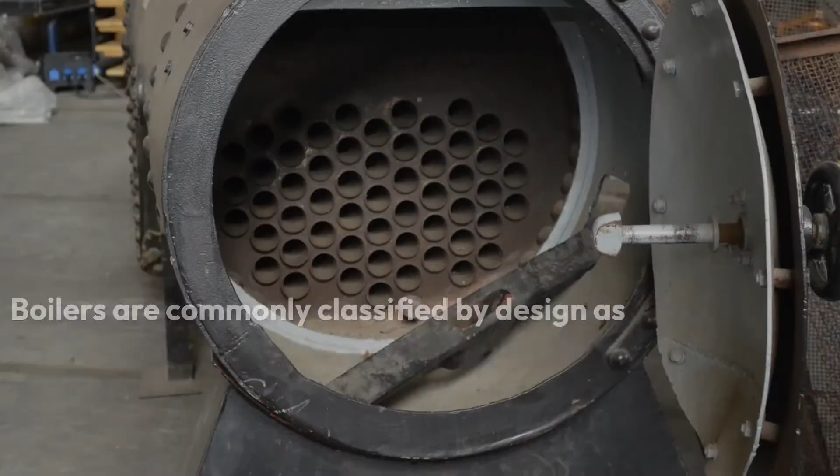Boilers and their related equipment provide steam and hot water for heat and industrial processes. Boilers are commonly classified by design as steam and hot water boilers, fire tube and water tube boilers. They are also commonly classified by their maximum allowable working pressure.

A boiler is a pressure vessel in which water is heated to produce steam or heated water. Steam is the vapor that forms when water is heated to its boiling point. Steam is commonly used for heating or process applications.

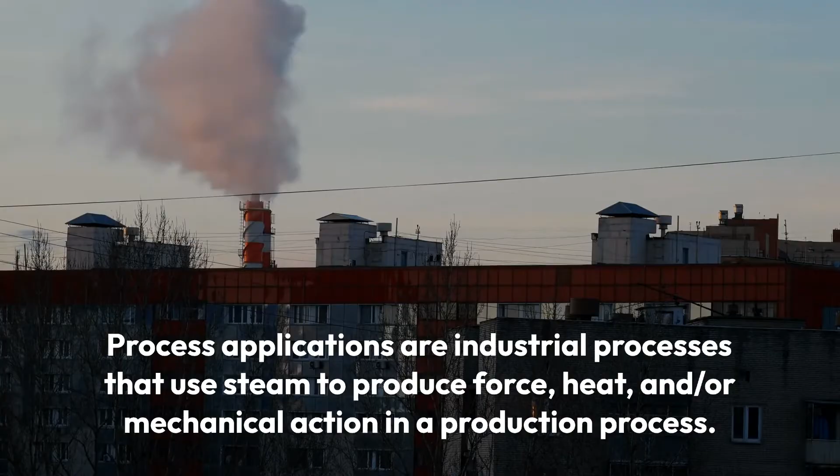Process applications are industrial processes that use steam to produce force, heat, or mechanical action in a production process. Paper mills use steam extensively in pulp processing and drying operations.

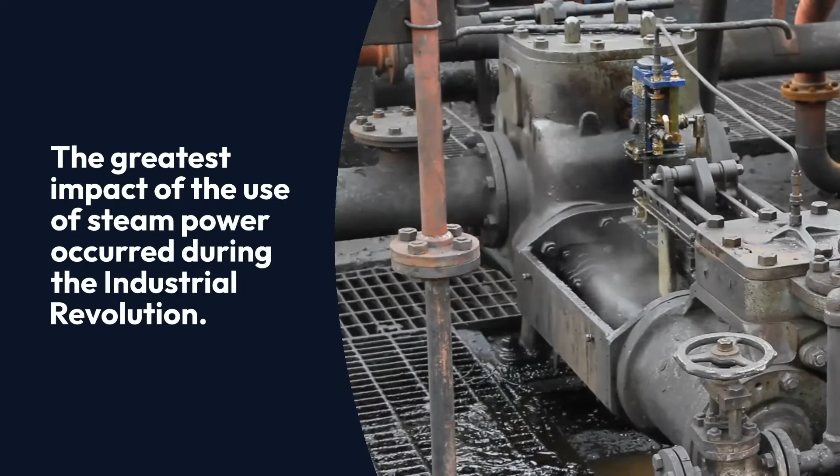The greatest impact of the use of steam power occurred during the Industrial Revolution. During this time, James Watt of Scotland is credited with the development of the reciprocating steam engine. Steam is produced as water is heated at its boiling point, 212 degrees at atmospheric pressure.

The heating surface is the part of the boiler where water is on one side and heat from the gases of combustion on the other. The actual heating surface of a boiler are the boiler tubes. Increasing the size of the combustion chamber will also increase the heating surface.

In a steam heating system, steam produced in the boiler is used throughout the system. When steam cools, it turns back to water. Condensate is steam that has lost its heat and has turned back to water. In a hot water heating system, hot water produced is pumped throughout the system.

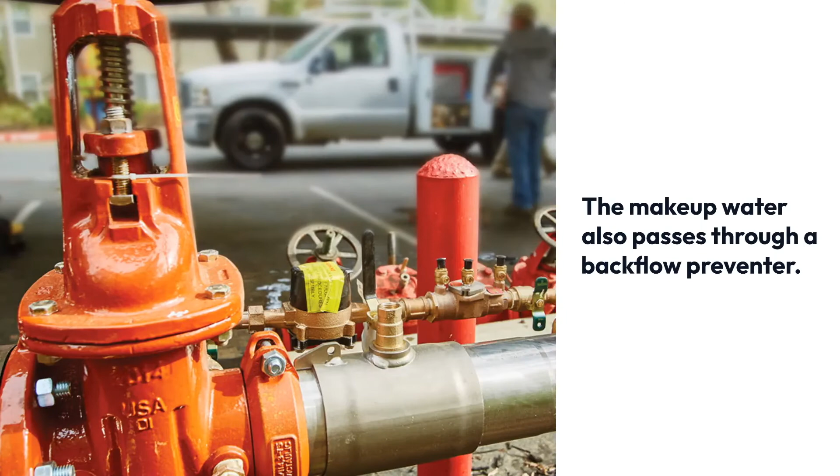Makeup water is added to a boiler to make up for the water loss due to leaks or lost condensate. Makeup water passes through a backflow preventer. This prevents the flow of water back to the potable water supply. A pressure regulator is also used to reduce the utility water pressure to prevent overpressure in the system.

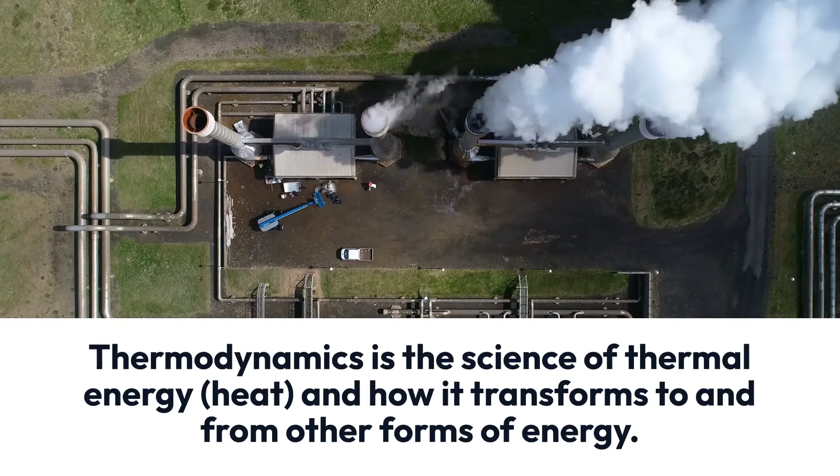Thermodynamics is the science of thermal energy and how it transforms to and from other forms of energy. The two laws of thermodynamics that help explain how a boiler operates are the first and second law of thermodynamics. The first law states that energy cannot be created or destroyed, but can be changed from one form to another. The second law states that heat always flows from a higher temperature to a lower temperature.

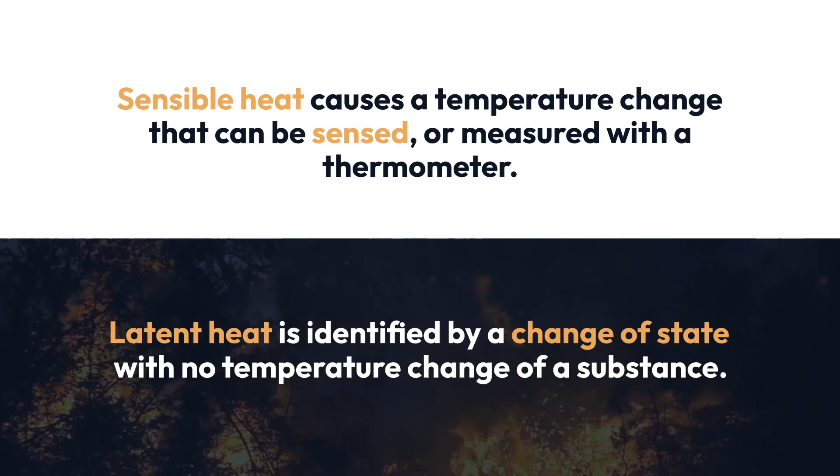Heat is the form of energy identified by a temperature difference, or a change of state. Sensible heat can be sensed, or measured with a thermometer. Latent heat is identified by a change of state, with no change of temperature. The quantity of heat is the amount of energy needed to produce a physical change in a substance. The definition of a BTU is the amount of heat energy required to raise the temperature of 1 pound of water 1 degree Fahrenheit.

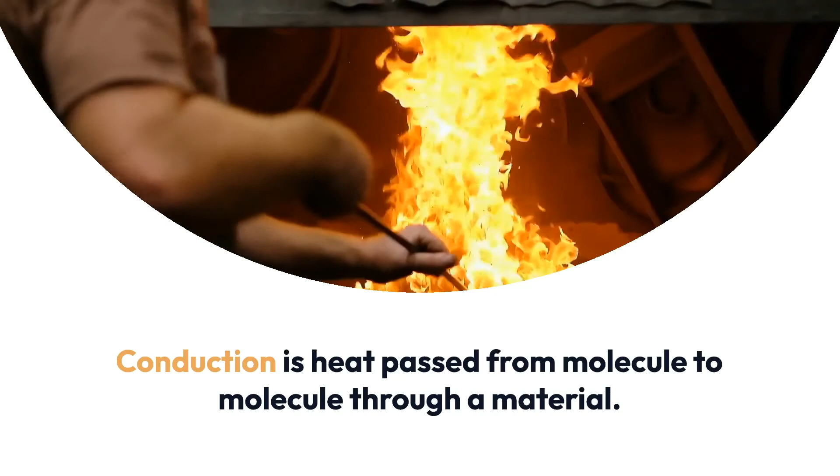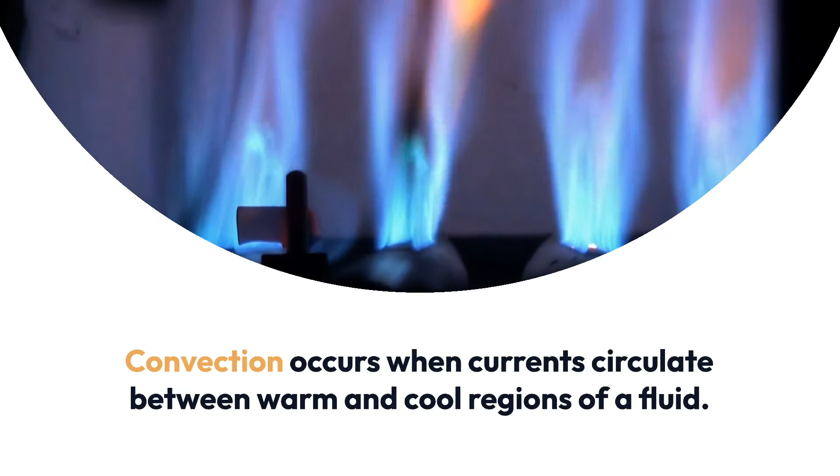The three types of heat transfer are conduction, convection, and radiation. Conduction occurs when heat is passed from molecule to molecule through a material. Convection occurs when currents circulate between warm and cool regions of a fluid. Lastly, radiation occurs with electromagnetic waves, without a material carrier.